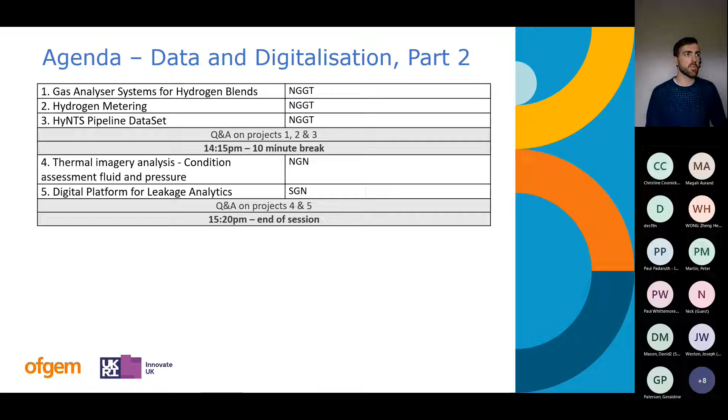Thanks so much, David. Hopefully you can all hear me okay. Good afternoon, everyone, thanks for joining. I'll be taking us through the gas analyzer systems for hydrogen blends discovery phase today. My name's Peter Martin, I work in the hydrogen innovation team at National Grid, and I'm joined today by Martin Croft, one of our other partners on the project from Des19ncor, who will also be supporting me.

We'll kick off with the problem we're looking to start solving with this discovery phase. Today's networks are relatively homogeneous in terms of the gas mixtures we transport, for which current gas analysis systems are deemed acceptable. However, in a future hydrogen network, there is potential for more significant variations in the blends of gas across a network. Therefore, there's likely to be a need for a much larger number of gas analyzer sensors on the gas networks that can accurately measure the energy value and content of blends of hydrogen, are quick to respond, cheaper than the solutions today, and able to effectively network through the Internet of Things to allow effective data sharing across industry and consumers. This discovery phase project is focused on the feasibility of using fuel cell sensor technology to carry out the required gas analysis in a hydrogen network whilst connected to the Internet of Things to help solve this challenge.

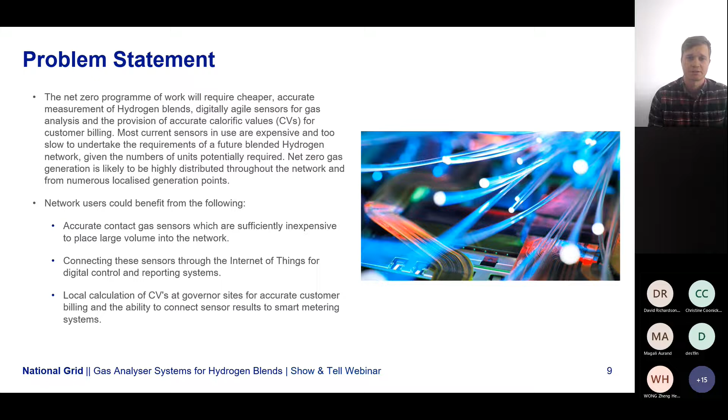This project has been a collaborative effort between partners Des19ncor, Gas Transmission and Metering, and also Cadent Gas. The overall objectives of this project have been to benchmark the fuel cell sensor capability against other existing gas analyzer systems out there, and to assess the technical and regulatory barriers and opportunities involved in the adoption of a new technology such as this on the gas network. Also, very important within the data and digitalisation theme, is to demonstrate the feasibility of Internet of Things connectivity through the use of this technology.

On the slide there, I've listed some of the work packages undertaken in the discovery phase to give you an overview. Work package 1 was a feasibility design stage, which built on use cases collected during the project to determine an appropriate system architecture for the technology. Work package 2 involved solution prototyping and fabrication, and putting together a lab and software systems test plan, which then feeds into work package 3, the rig testing of the prototype fuel cell gas analyzer against different hydrogen blends in natural gas, matched against 2 gas chromatographs lent to Loughborough University by National Grid. Finally, work package 4 was focused on putting together the technical report produced with those results from work package 3, and the intended plans for the alpha stage. Hopefully that gives you an overview of what the discovery phase has been looking to achieve, and I'll now hand you over to Martin Croft.

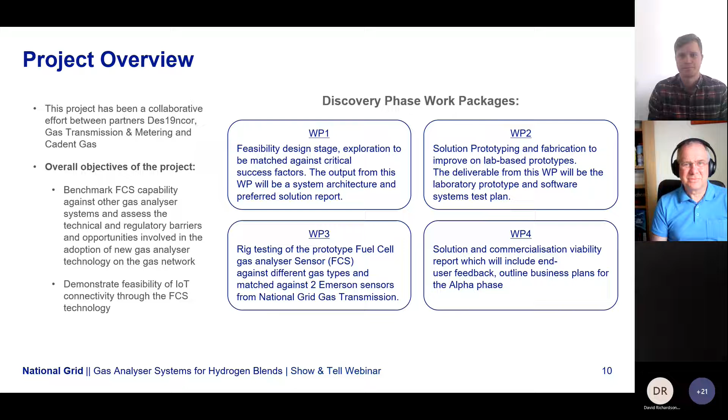Hello, my name is Martin Croft. I'm Managing Director of Des19ncor Limited. We've been working with National Grid to look at this discovery phase.

We know that the current analyzers out there are really not fit for purpose for the net zero goals. They're specifically very slow to operate - you tend not to get a reading for 4 minutes or longer if you set them off. They're very expensive, not only for the actual kit, but also the infrastructure and how they get installed. Our understanding at the moment from the supplier is that 2 units would be required, one for the normal hydrocarbon mix, and another unit for the hydrogen mix. They haven't integrated it into a single unit as yet. But also, more importantly for this particular project, they are not connected to the internet and Internet of Things.

We know that blended hydrogen networks, as Peter was saying, will require single, faster, cheaper sensors and a new digitized data architecture. So what we're doing in designing a new sensor is building these things in from day one. The fuel cell sensor is a blended gas sensor developed as a single unit, which can give accurate gas readings in near real time. So you don't have to wait 4 minutes and have 4 minutes of gas disappear down the network and then suddenly realize that's the wrong kind of gas you should be supplying.

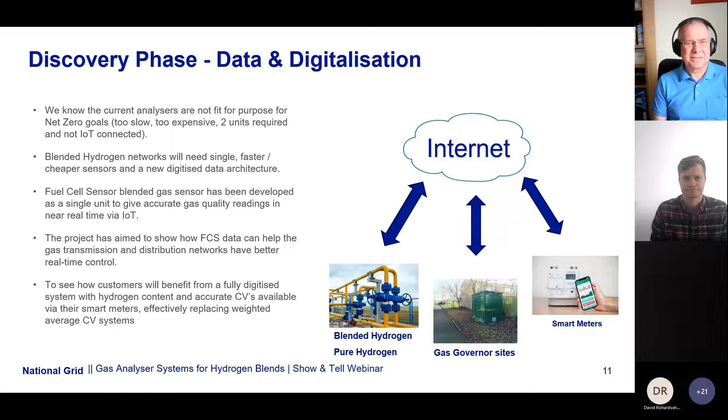So we're going to split these into two main groups of use cases. One is from the national transmission system. Obviously the gas national control center is number one and has always been taking the data currently, so they would need the data in the future. But then there are a number of new use cases for the transmission system that would need some kind of gas quality data.

We've got blending or deblending requirements in the network. If you're taking hydrogen in or trying to extract hydrogen, that would be a good place to look at the quality, as would injection of hydrogen in the network. That would also affect the gas quality and energy content by injection of hydrogen, as hydrogen has a lower energy content. Compression control is another area where we know the compressors will need to operate slightly differently in a blended hydrogen environment.

Having an accurate, real-time indication of how the blend is being mixed at the time it hits the compressor could help control that compressor and provide a much more effective and efficient way of doing the compression.

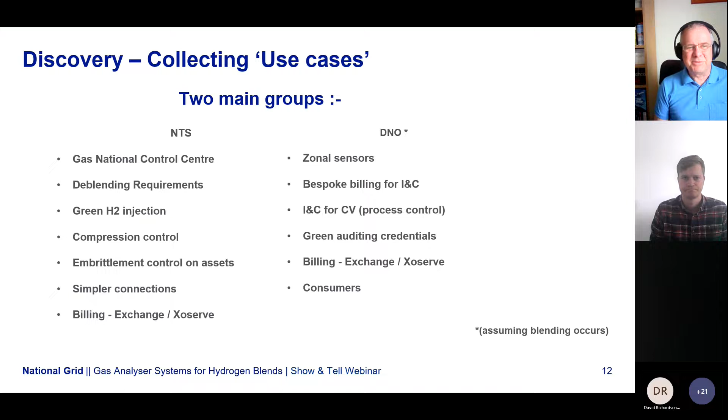So let's look at the activities that we've done. We collected the use cases over a number of different parts of the businesses, and we've done some basic analysis on those, but we know that there's a lot further in-depth analysis of those needed in the alpha and beta stages. And that's something that I'm sure Peter will come on to later.

But we also looked at the current data architecture, that the chromatographs use, and also proposed a new IoT design, which would be very light and flexible and applicable to many different sensor designs. To prove that it was fairly flexible and easy to implement, we did this on a fuel cell sensor and added a connection to the Azure-based platform, the one that National Grid currently use, but it could be equally applicable to AWS or any other data cloud platform, where you're looking to provide a secure wireless IoT connection via a wireless VPN, low power WAN network to connect what is critical infrastructure connections, but in a very resilient and cyber secure way.

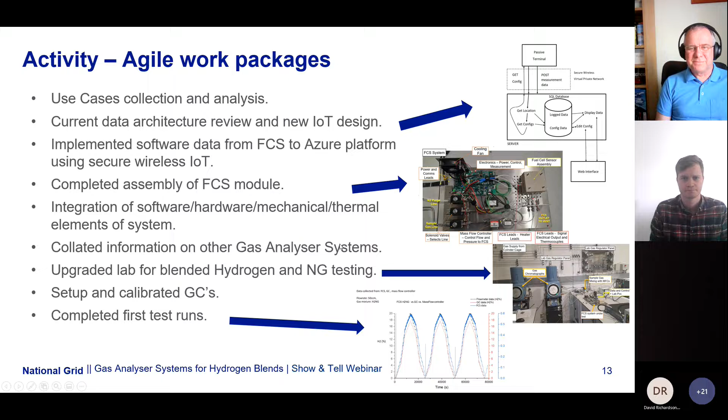So what have we seen from the benefits of doing this discovery phase?

We've discovered that there are a lot of use cases out there for gas sensing, much larger than we first envisaged in our application when we put the discovery phase application in. So those solutions now need to be examined, so we can see how they would be most serviced cost effectively, so that the right use case gets the right sensor in the right position in the network.

Then there is the fact that blended hydrogen networks will be deployed and they will need faster and cheaper sensors in a greater number of those applications, that slow and expensive sensors are not applicable.

And the cost reduction can be enhanced by the use of new digitized secure data architectures. This is obviously something that Innovate has in mind, is you need to think of how can we save money. There's going to be a lot more sensors out there, but if you can save money by having them a lot cheaper, then you'll have a much better network at the end of the day, and one that's more innovative.

And then we've also seen how the fuel cell sensor gas analyzer has been developed as a single unit to give accurate gas quality readings in near real time with IoT functionality built in. So it's not an add-on to the sensor, it's made as part of and integrated into the whole system, and at less than 1/20th of the cost of the existing system, how it's actually set up.

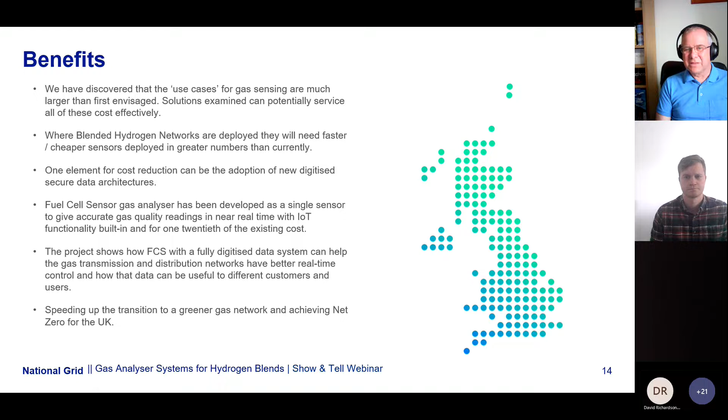Brilliant, thanks so much, Martin. So just to close off with our plans for the alpha stage of this project now. I think we've got some quite exciting plans for the alpha stage. We've made the decision to combine this discovery phase project with the other hydrogen metering SIF project, which Chris will be taking all of us through shortly.

The reason for this is that for us to be able to continue to effectively measure and manage the energy balance of our networks with blended gases, we'll need flow measurement and energy measurement systems to be able to function together. Therefore, we've decided to bring the two elements together in one project. I'll go through some of the key activities that are listed there.

So carrying on the work from the other hydrogen metering SIF project, which Chris will go over, and looking at comparing the capability of current existing hydrogen metering technologies in terms of the capability matrix, to enable us to do some testing in the beta stage.

And then another work package carrying on the work that we've been doing within this discovery phase SIF in terms of the gas analysis side of things. I think it's really important that we do continue to look at what else is out there on the market, what are all the potential options for analysing hydrogen blends, as well as continuing to develop this fuel cell gas sensor technology.

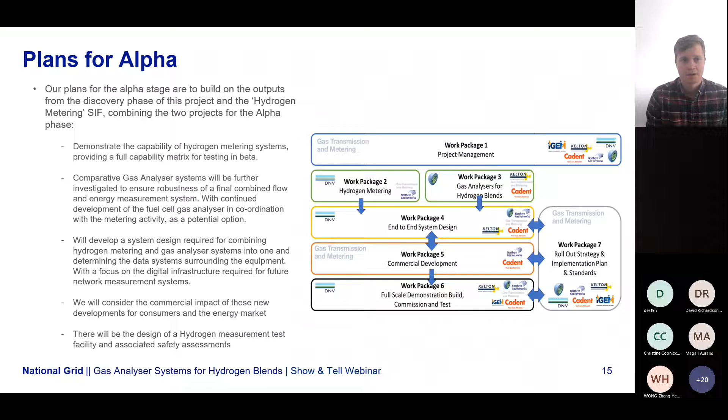And then something else I'm sure Chris will touch on as well is we're looking to have, out of the back of the alpha stages, not only some test plans for beta, but also the design of a new hydrogen measurement test facility. So I think that wraps up our plans for the alpha stage.

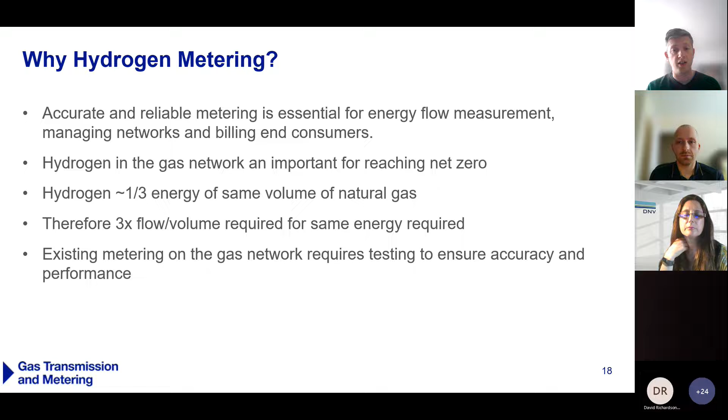So we go to the next slide, please. So again, a little bit more context. So we're looking at the whole gas transportation value chain. So what we mean by that is gas transmission, which is your national system, your distribution networks, which obviously deliver gas on a regional basis, and then where the network ends, which is typically at the emergency control valve, to where the consumer pipework starts, is typically your end consumer metering installation, and that's used for billing the volume of gas that's being used by the end consumer.

And it's because the technology that we use is very similar. So while there are different use cases at the different points of the network, the type of meters we use tend to overlap and we tend to share similar types of makes and models and manufacturers, etc. If we go to the next one.

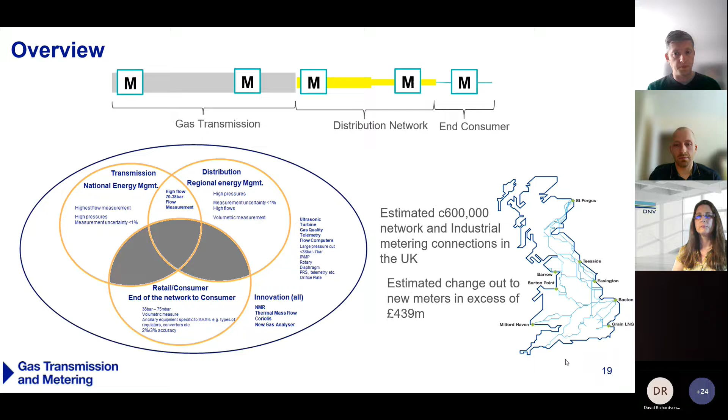So in terms of what we were doing in this discovery phase, it was really a feasibility study to test the value of the project in the eyes of industry stakeholders, as well as determining what the requirements could be from each of those stakeholders. So what we started off with was actually a hypothesis, which we said, right, what we want to do is build a number of metering installations from both repurposed metering equipment to test existing technology and new equipment as well to perhaps test new and different types of metering.

We want to operate them at hydrogen and hydrogen blends and make sure that they fully replicate the metering facilities that exist today on the gas transportation system. By doing that, we can get a deep understanding of how metering is going to operate on a hydrogen network or a hydrogen blend network. That's ultimately going to give consumers confidence in the data and billing they get, and make sure we can manage networks effectively.

So we looked at four elements. One was looking at stakeholders, again to test the value and understand requirements. We looked at the supply chain to understand what technology is out there today. We had a look at industry standards as well, which underpin the physical build of some of these installations. And then where we got to at the end was looking at different use cases, different types of assets to test, different tests and specification.

So the project team, as I say, was gas transmission and metering, which is part of National Grid, with Northern Gas Network support from a distribution perspective. DNV were our technical partners, and IGEM were there to support with the industry standards. If we go to the next slide.

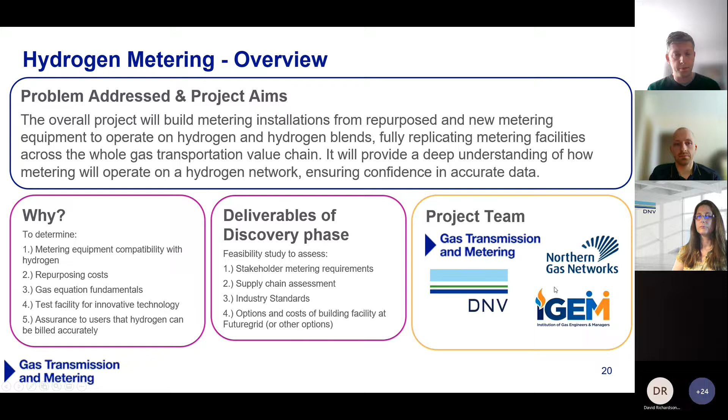So looking at stakeholder requirements, it's quite an intense piece of work. We spoke to about 46 people across about 26 different organisations, including regulators, BEIS, Ofgem, right through to metering manufacturers, energy users, energy transporters, consultancies, and some of the hydrogen projects out there today. The opening question, after we pitched what the project was around, was: is there value in this? Everybody came back and said yes, 100%.

There is value, and this is a really important piece of work to do. As well as confirming the value, what we outputted was some of the things stakeholders wanted to look at: existing assets, so we can understand repurposing costs. As Peter mentioned earlier, we also asked the question on gas quality and gas analysis technology, so that we could understand not just the measurement of flow or volume, but also include the energy calculations. Stakeholders also talked about how, in a hydrogen world, traceability of hydrogen was important to them, and understanding the purity as well.

Making sure that we do these tests in the real world environment, or as close to real world as we can, was important. Looking at industry standards again was key, which was one of the other work streams. But also, this project could be used to look at not just current technology, but also new technology, and potentially, for the gas network at least, innovative technology as well.

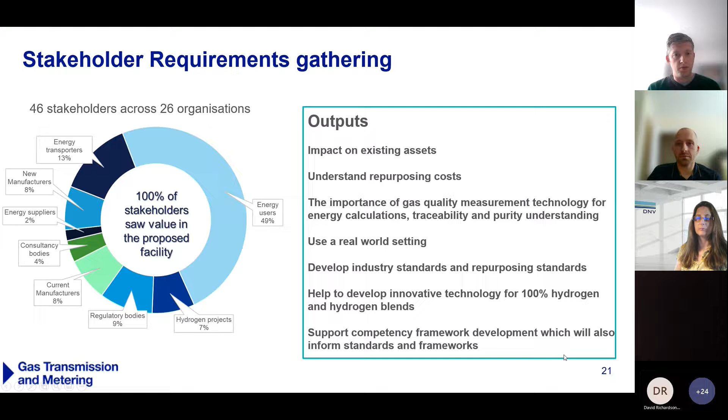Hope you can all hear me. As part of the project, we went out to the supply chain and did an assessment, and we sent a request for information out to 24 organisations. We got 16 responses back, from a mixture of existing manufacturers that we use a lot within the industry, and some startups as well. There's some encouraging new technology to the gas industry, probably not new to other industries, that's being developed, which was quite interesting. I saw nuclear magnetic resonance meters and some Coriolis meters as well.

It's also quite interesting that a lot of manufacturers are now out there, with a range of new products being developed. So in the next sort of 18 months, 2 years, there are a lot of products they're bringing on. There's also been really good progress by the supply chain looking at existing products: are they suitable, are they working, what blends will they work with. They've really done a lot of work so far, and there's quite a lot of information that came back on that.

Some of the gaps we did identify though were in sort of limited areas, so there is product coverage, but maybe only one or two products in that area. So going forward, some work will be needed with some manufacturers to see what they're looking at in the future. Next slide, please.

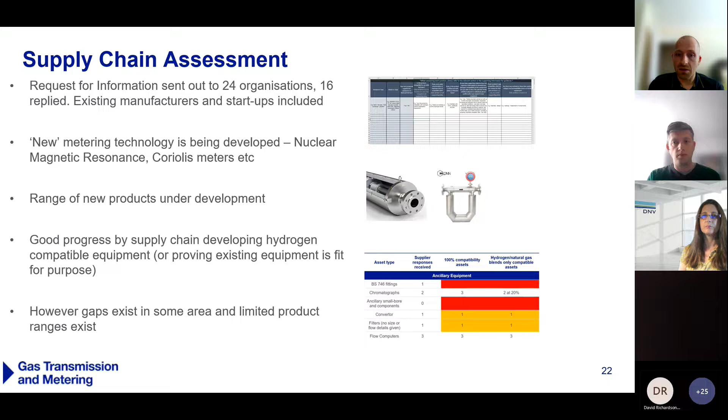Also, as part of the project, we did the industry standards review. This was looking at, jointly with IGEM and all the partners, the standards that will be used in metering installations across all the different streams - transmission, distribution, and in our world, it's the I&C metering.

So one of the bits that we looked at was where there'd be gaps. So what gaps are there? Where would we need to look going forward, and where would this project feed into that?

So one that did come up was meter suitability across higher flows and pressures for measuring hydrogen, just seeing how the impact of hydrogen at those higher flows would impact the meters.

Ancillary equipment is everything beyond the meter that's connected to the system - it could be valves, slam shuts, control systems. How will they be affected by hydrogen blends? Will they work? Will there be different characteristics? Will maintenance need to be changed for hydrogen and blends? Will it affect that? So that was one area where there are some gaps to be looked at.

And also the acoustic performance - under the new higher flows and higher pressures, how will that impact the installations? And also the velocities, the new energy requirements that are different to natural gas, how will that impact the systems as well?

The one that really came back to us from some of the stakeholder engagement was on the repurposing standards. There's been some work done so far by IGEM, but we're really trying to get a standard out there for the industry to use, giving good in-depth information and data on what's needed if you repurpose an installation, and how we can do this as an industry to strip best costs from installations already in situ, rather than putting new installations in.

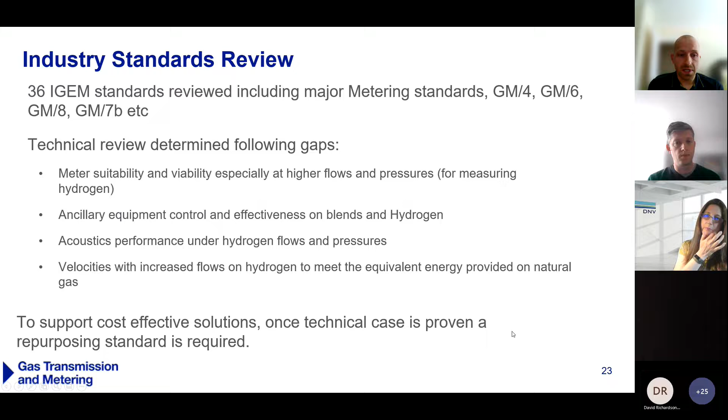It became apparent that there was a need for work both with hydrogen blends and for 100% hydrogen, and that the focus of where we want to take this project is on measuring volume and energy, and to take that into as real world a situation as possible. That's our statement that we want to use going forwards towards the alpha stage.

And we want to do a lot of different types of testing. Obviously, there's a focus on accuracy to allow the measurement, which is the key focus. But there's a lot of other testing that needs to be done on safety and on the life cycle of assets with hydrogen being used, as well as the gas quality equipment and things like flow computers and some of the calculations that will need to be done.

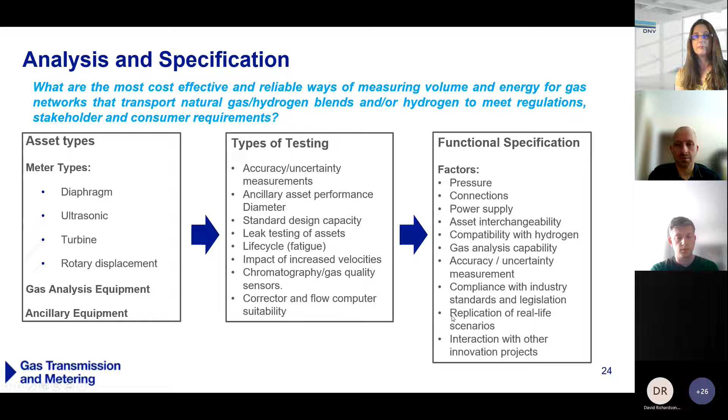We pulled these thoughts together and had a site visit as part of this project, going to look at the Future Grid and H21 facilities up at Spadeadam in Cumbria. Future Grid is a high pressure test facility, and H21 is more on the distribution network, so we've got different pressures, different pipe sizes. We had a look at both. There is already the capacity at Spadeadam to store hydrogen and service those two test facilities, which makes this site ideal, since there's already capacity for using hydrogen and a lot of network assets we can repurpose.

We will need metering installations, and we've already started looking at where we could obtain those from, both the transmission network and other installations that National Grid metering may have available. We're looking to cover the full range of pressures, from transmission down to low pressure end consumers. At the moment, we're not quite clear whether this will be one test facility with decreasing pressures, or more than one test facility linked into different parts of the existing facilities at Spadeadam.

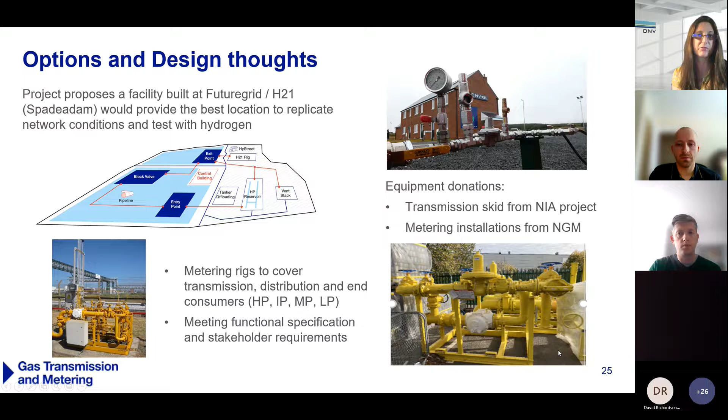Thanks, Claire. Thanks, James. Just to sum up the project, we've come to a number of conclusions, but these are the most pertinent ones.

What we want to make sure is that when we do build the facility, as Claire says, to be determined exactly how that would look, we want to make sure we're testing not just the meter. We're going to look at the installation as well, the ancillary equipment, sensors, pressure regulators, filtration, etc., because that all affects how the meter measures the gas flowing through it. So that's important to bring into the scope.

We talked quite a bit about the stakeholder requirement to bring in gas analysis, so we want to make sure we can do accurate energy calculations, but also perhaps some use cases in a pure hydrogen network, which stakeholders are interested in. So traceability of where the hydrogen has come from, the purity of hydrogen, etc., is something we want to start to look at.

As Claire mentioned, we'll do a number of tests on different metering technology and different types of assets. There's also an opportunity, as Peter touched on in the previous presentation, that if we build this at Spadeadam, we've essentially got a mini gas transportation system up there which can replicate what exists today, giving us the opportunity to look at the end-to-end measurement system, which might lead to more effective network operations and more efficient ways of delivering hydrogen blends and hydrogen to the end consumer. That's something we're really keen to take forward.

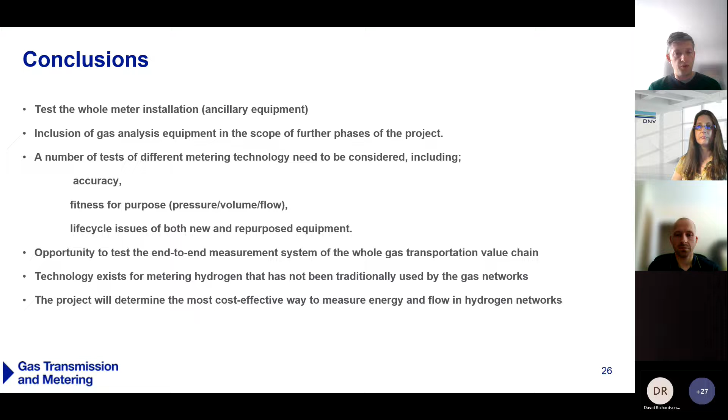So we've gone to the final slide. Peter talked about this in depth in his presentation, but to emphasize what we will do in the next phase, the alpha phase, is combine the gas analysis work that Peter and the team did into this as a whole hydrogen and gas analysis project. We'll carry on doing the work that would define the design of the installation we want to build, but there'll obviously be a key gas analysis requirement in there as well.

And this piece about the end-to-end system design is a great opportunity for us to really look at the whole network and how we could use the data that the measurement systems will produce to aid digitalisation and efficient network operation. The commercial package is to support billing methodologies being developed for hydrogen blends and hydrogen.

As you can see, the number of partners is increasing, so it's turning into a larger scale project. Given that stakeholders overwhelmingly saw criticality and importance in the project, and that it brings in extra factors they specified, it's really going to help us understand the data we'll need in future hydrogen networks, supporting digitalisation and making sure we can run our networks as effectively as possible to deliver gas to consumers in the way they need it.

So that's it from us. Thank you for your time.

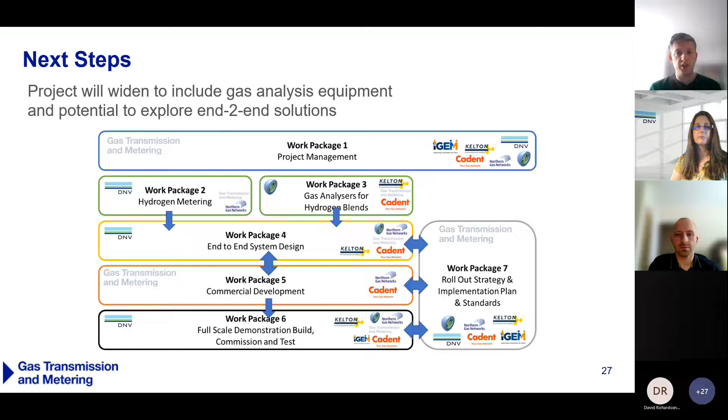Thanks so much. We're now going to talk through the HyNTS Pipeline Data Set and Discovery phase project. As I said before, I led this project from a National Grid perspective within the Hydrogen Innovation team, and I'm joined today by Adrian Horsley, representing one of our partners for this project, the Rosen Group. If you could move on to the next slide, please.

So what is the problem that we're looking to solve with this project? Well, it's very obvious that the existing national transmission system and local transmission systems were designed and built to transport natural gas, which, when compared to hydrogen, is relatively inert.

For us to consider repurposing our networks for the transportation of hydrogen, there are going to be new additional pipeline integrity considerations that must be made above what we currently do today on a methane service network. Hydrogen has the potential to degrade pipeline material properties, meaning anomalies may have reduced critical sizes, or anomalies not usually of much concern in natural gas service, such as cracks or hard spots, may present a new potential concern.

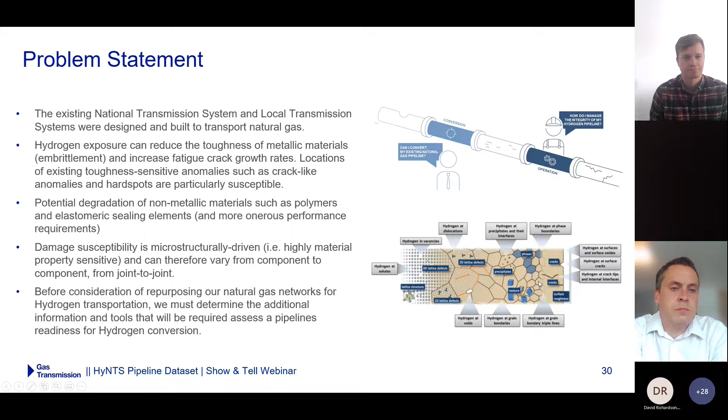So, to give you a bit of an overview of the discovery phase project: it has been a collaborative effort between partners Rosen Group, Gas Transmission and Metering, and also Cadent Gas.

There have been two overall primary objectives for this project as a whole, across all phases: to define and gather the data necessary to facilitate repurposing of above 7 bar pipelines on both the NTS and LTS systems, and to develop the tools and processes to store, align and visualize data to facilitate the integrity management and decision making that will take place post-repurposing of our networks for hydrogen service.

So let me take you through some of the work packages completed in this phase. The first work package was focused on establishing the current level of information that National Grid and Cadent hold on our pipelines, how it's stored, what it looks like, and determining the key gaps between where we are today and where we need to get to for hydrogen service.

The second work package was then looking to take those key gaps and do some work to establish the current inline inspection technologies out there, and their capabilities to gather that additional data we potentially don't have today on our pipelines.

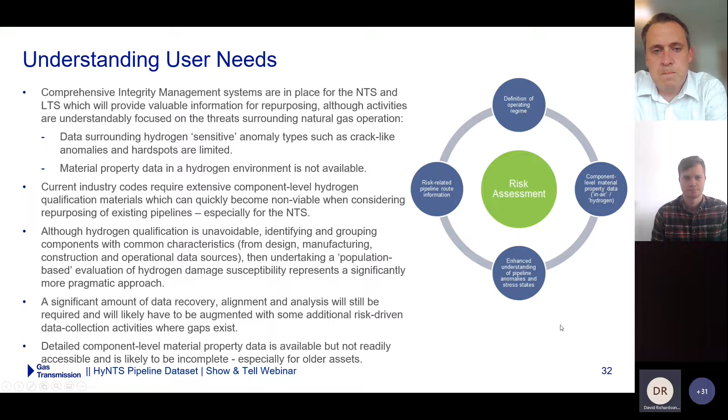I've discussed already, but during the project, key activities - first step was to define the data requirements, within the context of an overall approach to repurposing pipelines for hydrogen based on existing standards, likely future operational regimes, and the current industry hydrogen knowledge base, which is ever developing.

Then we looked at the range of data sources that exist for the NTS and LTS assets to support repurposing as part of current natural gas operations, as well as how readily accessible the information is.

We looked at where established and emerging pipeline technologies can support the collection of the additional data that we need surrounding anomalies and materials to repurpose and support future integrity management activities. We identified how those technologies could be impacted by hydrogen - a lot of them, the majority, are designed for use in natural gas service.

We looked at the synergies with other ongoing UK hydrogen initiatives where they can feed data into repurposing of the NTS and LTS, particularly ongoing material testing activities in hydrogen environments, which is going to be key to the justification. And then, as Peter said before, we looked at the optimum data management system structure to facilitate the efficient storage, alignment, and visualization of the additional and more granular data sets that are going to be needed to support repurposing. So it's all well and good recovering this data, but it needs to be structured to facilitate efficient integrity management decision making. And the last thing, we developed a methodology to rank the repurposing readiness of network pipelines based on future operational regime, data availability, and risk-based metrics.

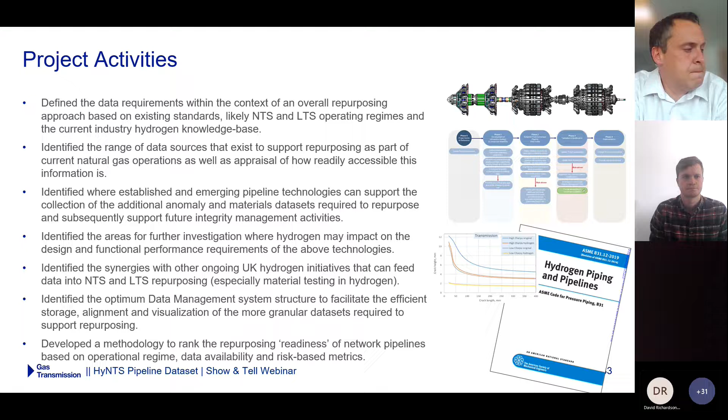So we looked at all these things. What did we find? Where can we go? Which direction? Well, positive all round, to be honest. The design, construction and operation of the NTS and LTS assets has generally exceeded industry best practice over the decades. This means there are a large range of archived and electronic primary and secondary data sources from throughout the life cycle available to support material characterization and identification of credible anomaly types taken into service. There are existing and emerging technologies, both in pipe and external, that can support the identification and monitoring of the additional hydrogen sensitive anomaly populations that we're going to be interested in. These technologies can also support this more efficient and intelligent approach to material property verification.

So there's grouping of common materials with common characteristics to make this whole justification a lot easier. And as I said before, there is a lot of synergy with the other UK hydrogen initiatives where there are a lot of material testing activities going on in hydrogen. This project, though, will obviously baseline the actual components and materials that exist in the current system and allow rationalisation against the test work that's going on and identification of gaps.

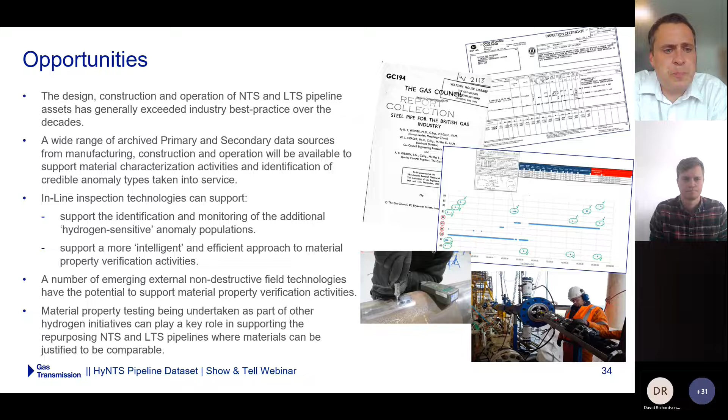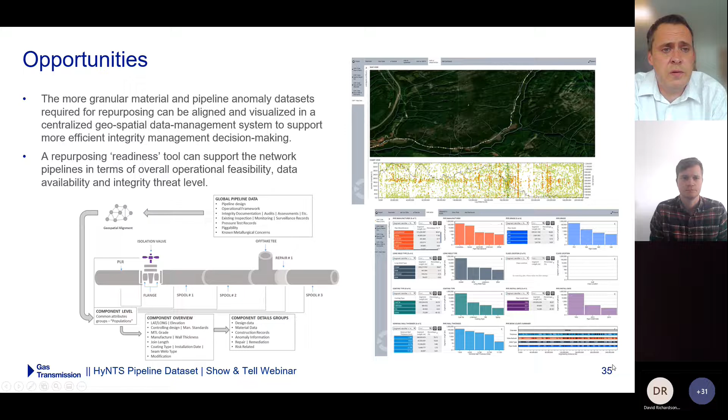We had a detailed look into data management systems - what is the most optimum and efficient way to store all of this data, to visualize it, to help decision making. We've proposed a way forward in terms of a centralized geospatial data management system to support more efficient integrity management decision making. There's some visualizations shown there in terms of overlaying multiple data sets to identify threats, data gaps in materials, etc. And the repurposing readiness tool, which we outlined in the discovery phase, can really support network pipelines in terms of overall repurposing feasibility, identification of data gaps and threats as well. So that's really a companion tool to the actual repo to support the repurposing process itself.

Efficient data collection and management, and the framework surrounding them, are a real key input into the viability of repurposing. So not only recovering, but organising data as well to make efficient decisions with. The level of information, the detail that's needed to justify is going to require very efficient organisation of information. So it's a key enabler to the whole repurposing activities going on.

The approach that we've proposed for data collection and data management will promote more streamlined repurposing across assets with common characteristics. So we can apply material knowledge from one system to the other. We can scale it up, scale it down, and even start to look at transferring it to wider global oil and gas network infrastructure. It really is going to be a materials and anomaly database there. And as I said before, the output of this project, the data collection, should really be used to shape hydrogen qualification activities being undertaken across other UK initiatives, because we're going to really build up this vast knowledge of materials across the network components and really then allow the identification of where do we actually need to perform hydrogen qualification testing to substantiate materials as well.

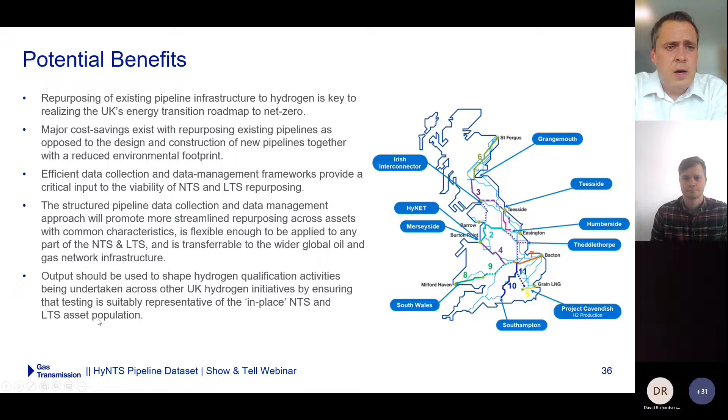Thanks, Adrian. So yes, go for the plans for Alpha now. So this project will be progressing to Alpha. I guess the main focus for the Alpha stage is building on the key findings and approaches that have been defined in the discovery phase, and then looking to pilot some of those approaches on a specific section of the network, whilst also looking to start applying for live trials in the beta phase. So let me run through some of the main activities that we're looking to complete in the next phase.

As I've mentioned, we're looking to pilot population-based data collection activity against a selected NTS feeder. This will involve a data gathering exercise for a specific section of the network that is likely to be an early candidate for hydrogen repurposing, and then looking at, within the approach defined in the discovery phase, the gap analysis for what we currently have against what extra information we're going to need, and then building on that, identifying the options available to close out any of those identified data gaps. So that's new inspection techniques, technologies, and different analysis.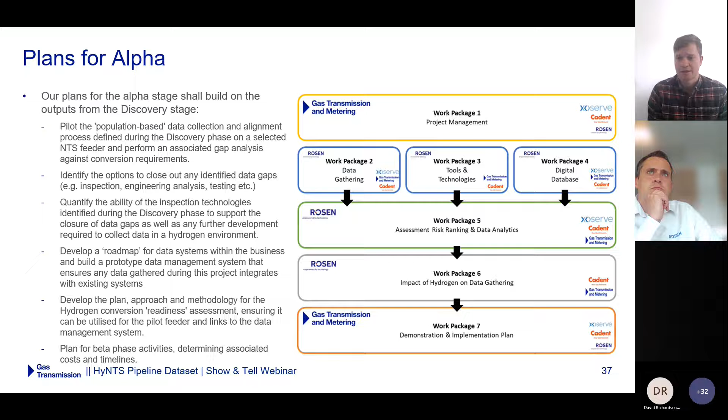And then, as I touched on earlier, it's important to start thinking about the plan for the beta phase in terms of conducting live inspections or testing on that section of feeder, and then coming to a conclusion on the likely costs and timelines for that exercise. So that's a summary of the plans for the Alpha phase of this project. I look forward to any questions you may have. Thanks very much.

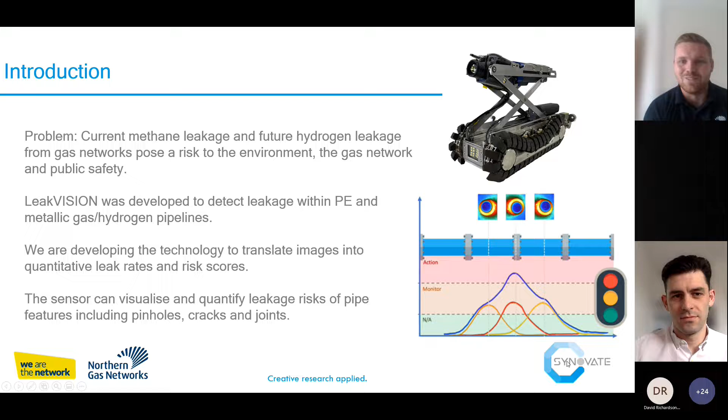Perfect, thanks. So how the technology works that we developed: we have a thermal imagery system with a gas exciter. We effectively excite the gas within the pipe, and we're able to then see and visualize where that gas leaks from. So we're able to look at things like the types of defects in the pipe that are leaking, the population, the density, and the exact internal location of those defects.

We're also able to estimate the size of the leakage as well through those defects. So that's all really important information when we're considering, as Nick had said, moving to net zero, minimising current methane emissions and what that means for abatement and net zero targets, but also looking for what that means from a risk perspective for hydrogen operation of pipelines and operational efficiency if we come to do a transition, and we need to make sure that the pipes and the network is fit for hydrogen, hopefully ahead of time, to make sure that swift switchover can be done effectively.

The key aims of the project are to do leakage detection and repair and really strategically target what is a global challenge in leakage detection and repair costs. These are typically high, as reported by the IEA, the International Energy Agency, and they are high irrespective of where you are as well.

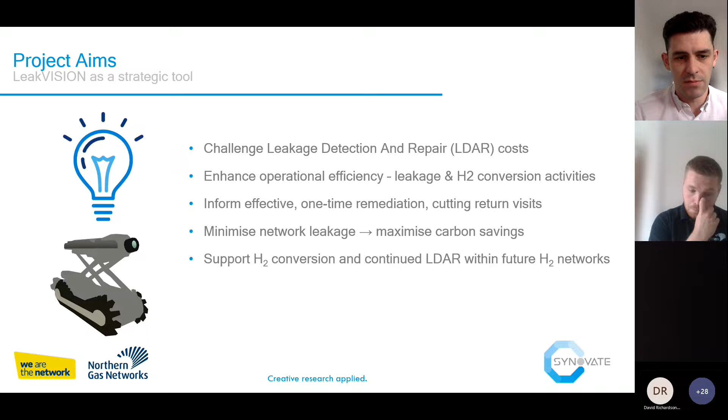Typically, highly populated areas are a little bit higher. In the UK, it's often called escape, location and repair as well. Like I said, we want to enhance the operational efficiency for the switchovers, minimise network leakage and support H2 conversion.

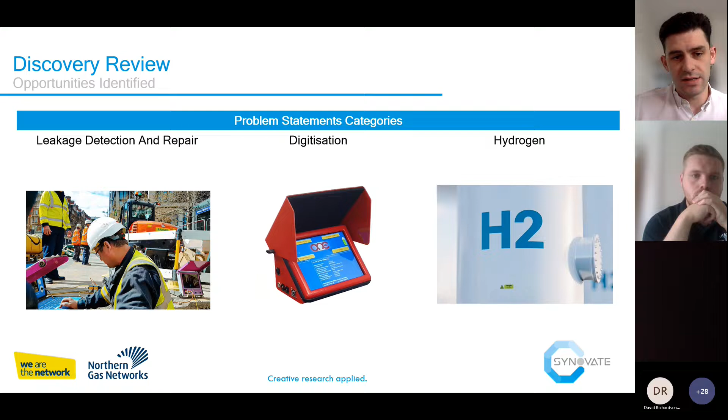And what we found is those use cases and problem statements typically cover three main pillars. They're leakage detection and repair in its various guises, digitisation and hydrogen conversion.

So in terms of user needs, we spent a lot of time working with the guys in the field, and we've been very fortunate to get really good access across Northern Gas. So different teams looking at their asset strategy, looking at the operational side of the business, looking at what they're doing for a lot of their hydrogen work with the H21 and how that crosses over with the other various schemes that are in place. And we've been able to then really test a lot of the assumptions and understand where maybe some of the larger risks sit and what we need to be doing in the project going forward to make sure that we can attack those appropriately.

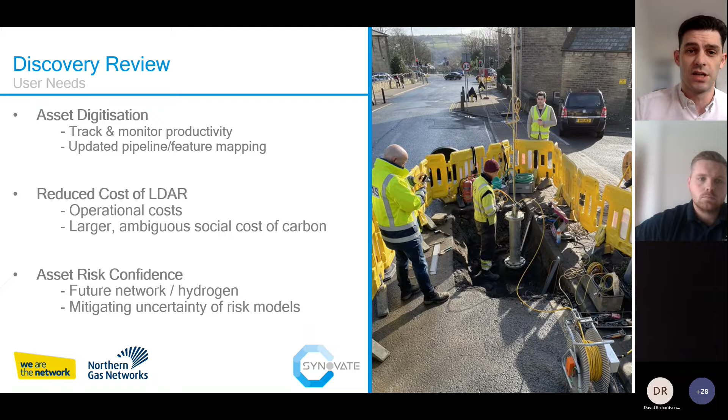So how we worked, it was generally a really, really good project, this. A lot of challenges with the 2-month timeline. I think that was the main kind of risk that we'd had on our risk register, but it was very successful in terms of cramming everything in, really.

To do the stakeholder piece, we ran several industry events, networking seminars, and a really successful questionnaire to gather a lot of feedback and information. We put together a successful World Gas paper so we can present this to a global audience and make sure that we're getting the right kind of feedback from a much wider audience than even just the UK. We've done some showcasing demonstrations and we've had detailed discussions and a number of meetings and calls and other bits and pieces to support that as well.

We spent a lot of time doing research in this project and a lot of time trying to build up a costing model that supports the project, the assumptions and the use cases that we've got. And we've tried to baseline those against what we forecast is going to be the current operational model for a lot of the scenarios that we're expecting.

And we've used the best available Green Book approach that we can to then look at the difference that we can get through the technology, the digitalisation and the new sensing and data for leakage to then give us estimates and an envelope of what we believe the benefits case will be from a socio-economic cost perspective, a cost of carbon, a carbon credit perspective, an operational perspective, and then a little bit of a fuzzy approach to what we believe those wider economic, societal and customer benefits will be as well.

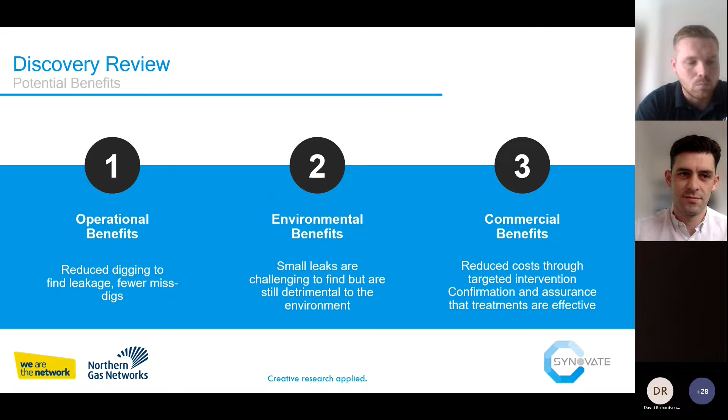Clearly, it's difficult because there's a lot of assumptions and a lot of risks at this point in terms of the hydrogen conversion, and whether that will or won't happen. So a lot of the numbers are at a relatively wide scale, but the ability is that as we gain more understanding by using this sort of technology on more occasions, it really does help to narrow those costs down to a more accurate figure, I'd say. Next slide, please.

So looking ahead, what we're going to do in the next stages is really target the problem statements and use cases to develop go-to-market strategies. So what that means is we're going to focus a bit more on the specific use cases that we've come up with and the specific value propositions and benefit cases that they have - whether that's operational hydrogen, leakage detection for hydrogen, or leakage detection for methane to reduce and get to net zero.

We've highlighted key risks for our Alpha project, and we're looking to test a lot of those risks and the route that we have to get to this commercial product, to make sure that within the beta, we have a very well-defined, risk-assessed plan that we can work through systematically to get to this strategic aim. Next slide.

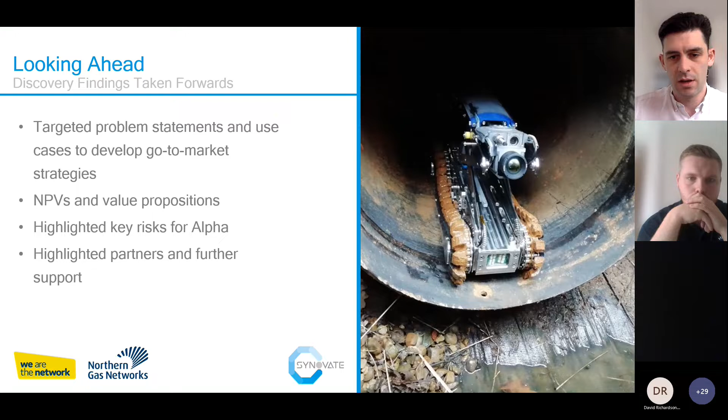So immediately in front of us, we've got the Alpha bid that we're just submitting, and then we're looking to develop a beta stage plan. We're also planning broader stakeholder engagement, looking at other technical people that we can bring in, policy, local government, and internationalisation. We're very fortunate to be going to World Gas later in the week to present there and to make sure we can get dissemination of the technology across the globe and across the academic boundary as well.

And that's it from us. Contact details there. Thank you very much for the time.

Thank you both. I'm actually drinking from my Northern Gas Networks mug from LCNI 2018 or something today. Other Energy Network branded mugs are available, of course.

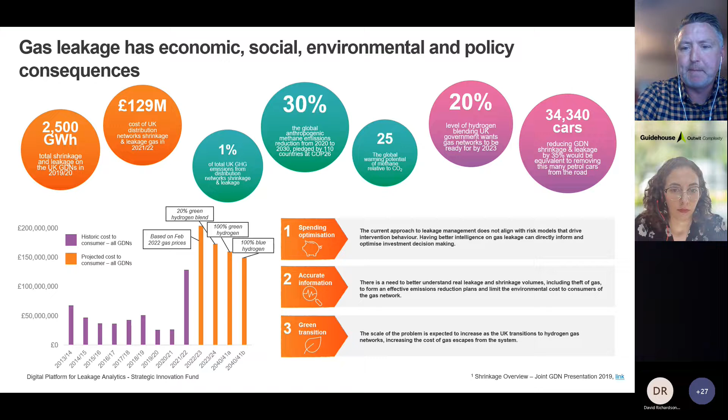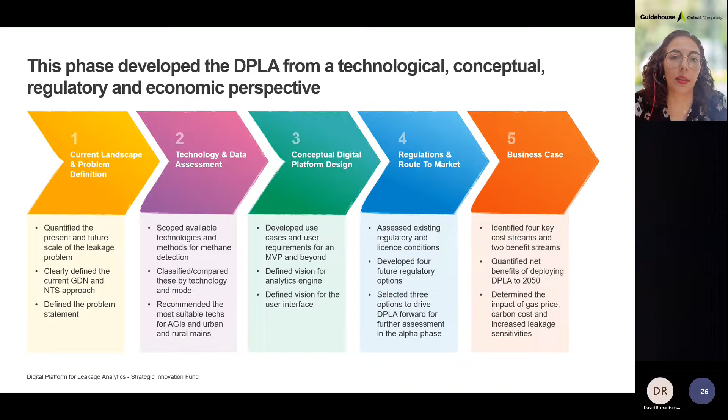Thank you, Matt. Following on from that, I'm going to talk you through what we covered in the discovery phase. The aim was to assess the feasibility and develop the concept for DPLA, the Digital Platform for Leakage Analytics. The idea is that it would give us a view of methane leakage at a national level from the distribution networks, dynamic and real time, as opposed to the current model, which is theoretical and updated only once a year.

So that's what we were trying to achieve. We looked at that from a technical perspective - what would be needed, what the concept would be, what changes would be needed from a regulatory side, and also whether or not it's economically feasible to achieve this.

Matt just took you through the first step, the current state of distribution leakage emissions and the problem definition. The second step was technology and data assessment. Here we wanted to scope out what technologies are available now that weren't available maybe a couple of decades ago when the current method was implemented, and how those could help us measure methane emissions from the system and improve accuracy.

We benchmarked these against certain key features like cost and sensitivity. We looked at categorizing them in different modes, and we actually interviewed 8 providers of some of these novel technologies to gain a better understanding of that.

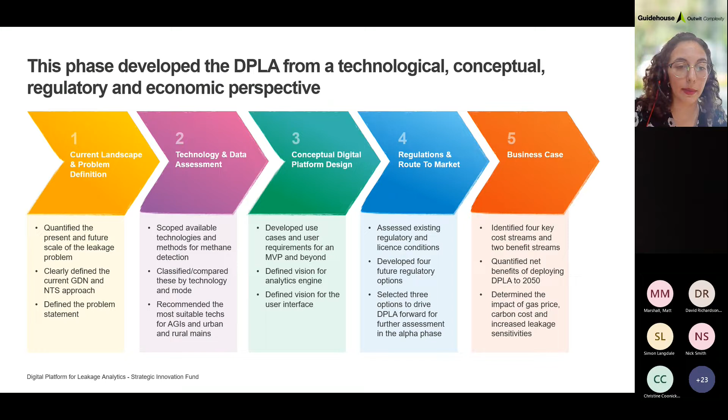Okay, first I'm going to talk about some of the technologies we looked at. We classified these based on their temporal aspect, their mode, and their technological features. On the temporal side, we classified technologies as either continuous or non-continuous. Continuous means things like hydraulic models or measuring instruments installed on the network that are always on, taking readings every few seconds.

Non-continuous were more technologies used for routine surveying of your assets to check if they're leaking, but that you have to go out and use on site - they can't just be left to operate continuously.

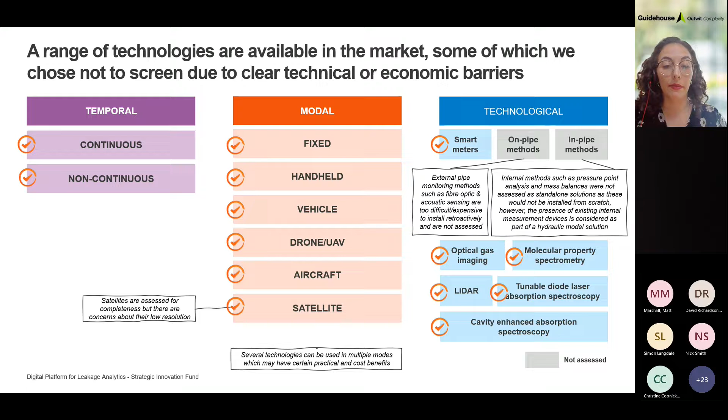On the mode, in terms of how these are actually deployed, you have fixed type sensors, usually the continuous ones. You have handheld devices that operatives can use to walk the length of pipelines or some sites, taking readings for methane. There are vehicle-based sensors driven around which measure methane as they go. There are also drone-based or unmanned aerial vehicle mounted systems really emerging in the market now, as well as some aircraft mounted ones, which can be either a small plane or a helicopter.

Finally, there's the satellite methane monitoring option, which we scoped out in the application phase as potentially really interesting because it can see things from such a high scale that it seems like it could be really efficient. We did assess them, but we found that the resolution you get from those is quite a bit too large, so it's very hard to actually pinpoint where your leaks are coming from.

You get kind of these 25 by 25 meter squares that tell you something here is leaking. But we've concluded for now that at this stage they're not actually granular enough for this application.

In terms of the actual technologies themselves, there's things like smart meter data, optical gas imaging devices, various spectrometry based technologies, LiDAR, and also some on-pipe or in-pipe sensor options, which weren't assessed as part of the project because we deemed that financially and practically it's not something you can really do retrospectively. These are really things that are best suited for new networks to install at the same time as your new pipes.

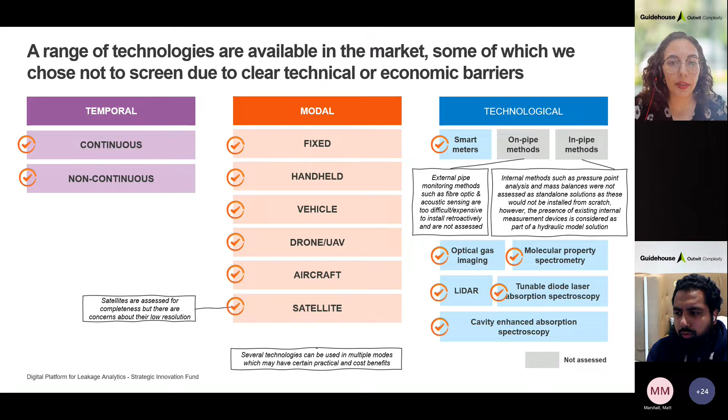So the point of the DPLA as well is that it needs to be able to bring together measurements from different technologies, from different data sources, and to aggregate those to give some useful insights.

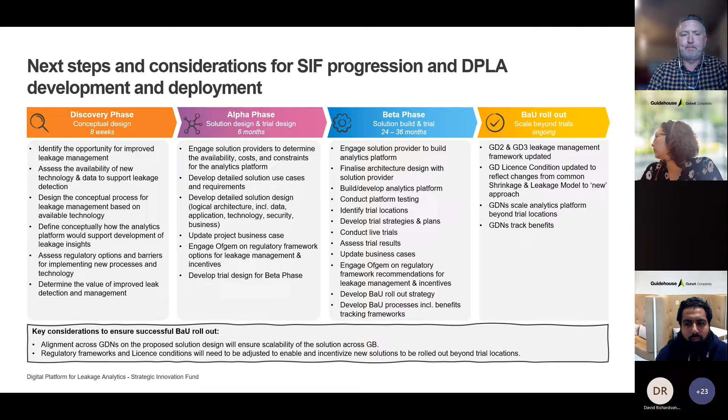Work package 1, commercial - looking at commercial design options and refining the business case. Work package 2, the digital platform and analytics design - there's a lot of work in this one, involving vendor engagement and demos, understanding platform requirements, assessment of the current system landscape, and developing requirements for an enhanced hydraulic model.

Work package 3, technical options, selection and feasibility - developing case studies, understanding business model options, and defining data collection requirements for each technology type. Work package 4, change - developing regulatory change options and recommendations, and looking at the preferred option for changing the current leakage model.

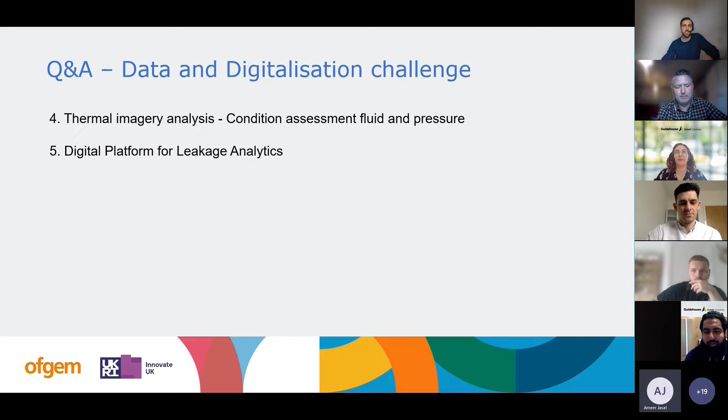If I take that for the DPLA side of things, absolutely, you're right. That's something we've considered and thought through in the discovery phase. We looked at both upside and downside - whether you'd observe less leaks, which is probably unlikely, and whether you'd observe more leaks. In terms of the business modeling, we made an assumption that total RepEx expenditure on an annualized basis will remain constant, and you just prioritize within that existing work stack. But through Alpha, we want to use the change work stream to delve into more - what does that mean from a change perspective? If we do get more leaks, would we increase the level of CapEx to reduce the overall number of leaks? Would we target super emitters? What types of change will be required around the safety and environmental thresholds for this to work? So really good point - more work to be done in that space in Alpha.

Would anyone else like to respond to it? So I guess from our perspective, it's very similar in terms of that space - it's still unquantified. There's still a lot more work to do to actually nail down what that looks like. In terms of how we look to deploy leak vision and similar technologies today, it's still using standard and traditional response methods from the gas networks. A member of the public reports a gas escape, an emergency engineer will go out, secure and locate the escape, and categorize it. Then there's the future aspect - actually getting to site, deploying the robot to pinpoint where the escape is, and reducing that response time once it's been categorized and pinpointed. Clearly at this point that wouldn't increase the number of escapes - it'd reduce the time it takes to respond to them, meaning we could respond to more if it works on that productivity basis. But moving forward, if we look to proactively use leak vision to seek out more leakage on the network, there will clearly be an impact on resourcing, which in my own personal opinion isn't a bad problem to have in terms of reducing emissions proactively. So I think it's a good problem to have in reality.